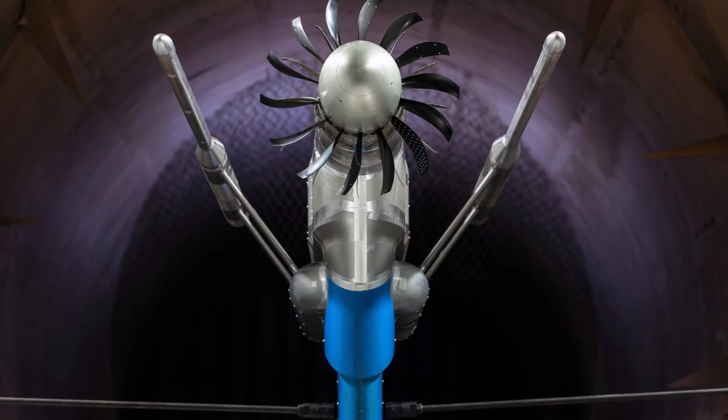Because here is what most people do not realize. An airplane does not fight gravity. It uses something else entirely. And the moment you understand what that is, you will never look at a takeoff the same way again.

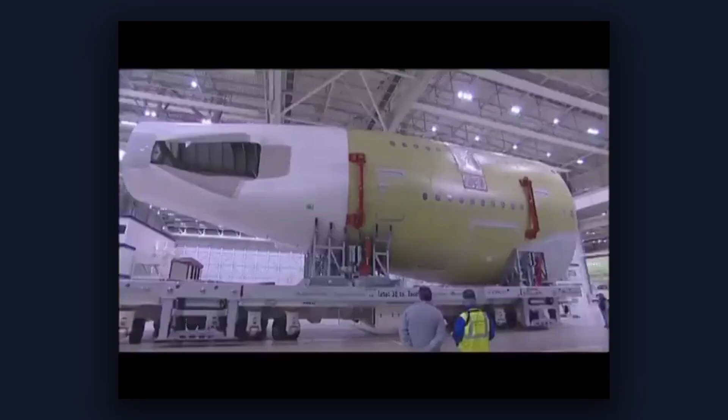Let us start with the scale, because it matters. The Airbus A380, the largest passenger aircraft ever built, has a maximum takeoff weight of around 575 metric tons. That is roughly the weight of a fully loaded freight train. Not a car, not a truck, a freight train.

And this machine does not just barely get off the ground. It climbs to 40,000 feet and cruises at 560 miles per hour for up to 15 hours without stopping. By common sense, something that heavy should never leave the ground. But common sense is wrong here.

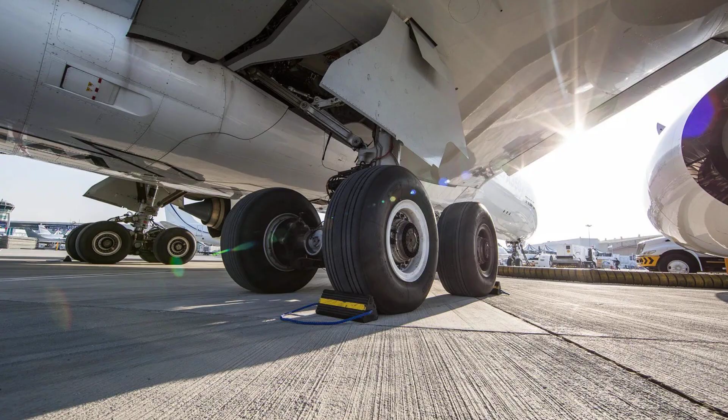And here is why. Every airplane in flight is controlled by four forces. Weight is gravity pulling it straight down. Lift is an upward force generated by the wings. Thrust is the engines pushing it forward. And drag is air resistance pushing back.

When lift equals weight, the aircraft holds altitude. When thrust equals drag, it holds speed. The moment one of these forces shifts, everything changes. It is not magic, it is not defying physics, it is physics working exactly as it should. But that raises the actual question: where does lift come from?

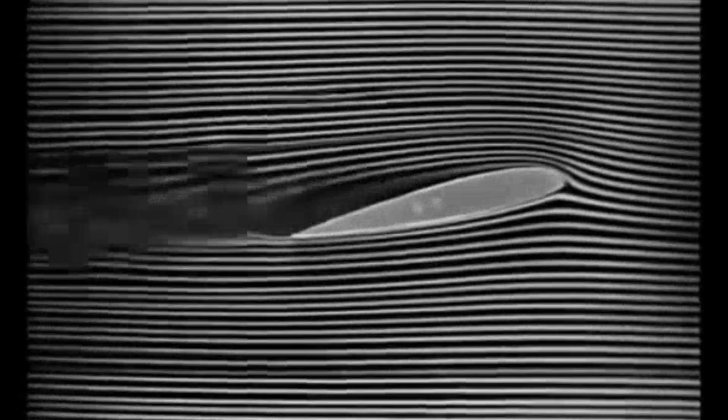You have probably heard the standard explanation. Air over the top of the wing travels a longer path, so it moves faster, creating lower pressure, which pulls the wing upward. That explanation is taught in schools. It is also incomplete. In some cases, it is just wrong. Here is what actually happens.

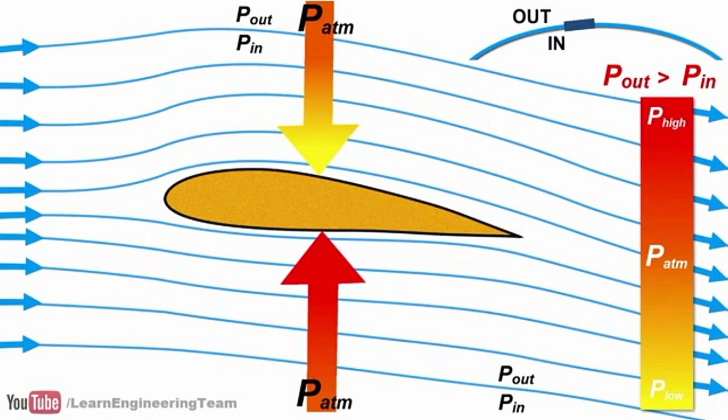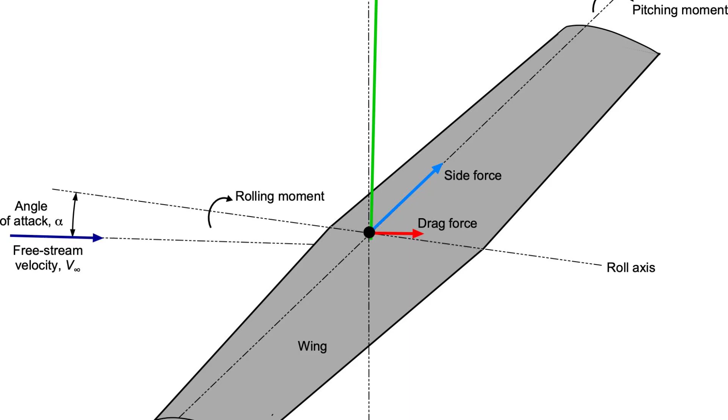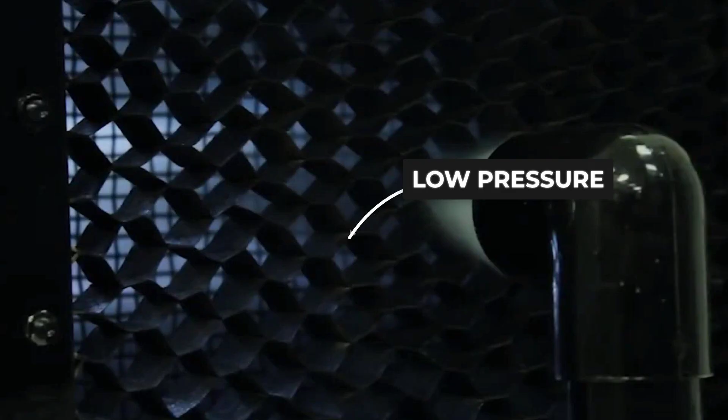A wing has a specific shape, curved on top and flatter underneath. During flight, the wing is angled slightly into the oncoming airflow. That angle is called the angle of attack. As air flows around the wing, the flow over the top surface accelerates. Pressure above drops. Pressure below stays higher. That pressure difference produces an upward force. But that is only part of it.

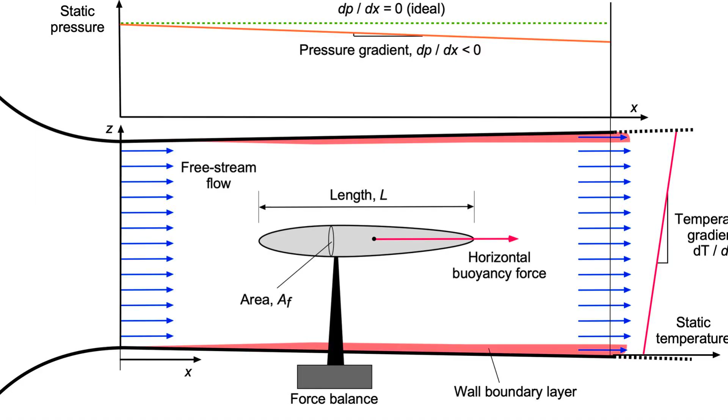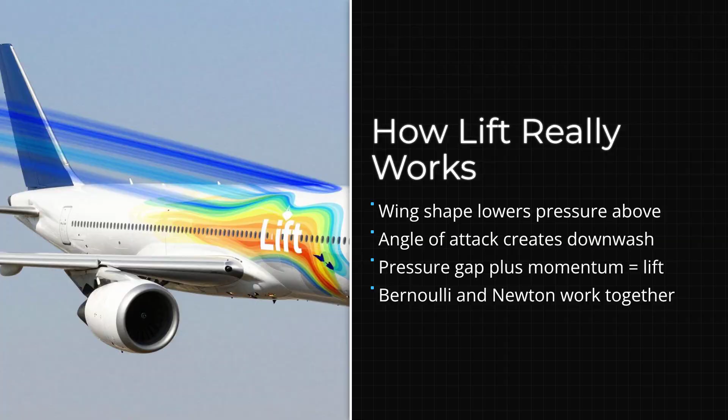The wing also deflects air downward. According to Newton's third law, if the wing pushes air down, the air pushes the wing up with equal and opposite force. Bernoulli and Newton are not competing explanations. They describe the same event from two different angles. Lift is the result of both the pressure difference and the downward deflection of airflow. Together, they hold hundreds of tons in the sky.

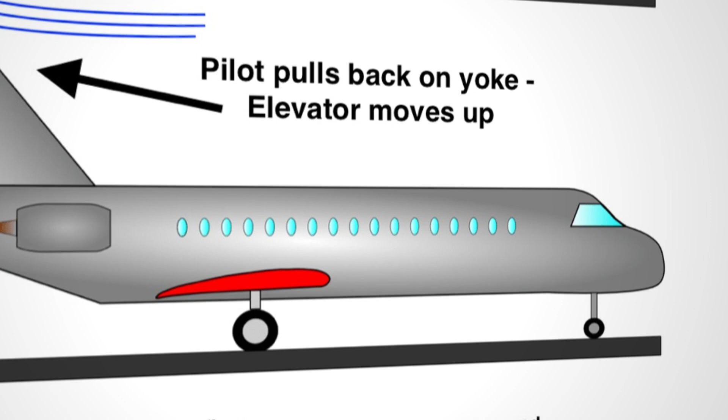But here's where it gets interesting. The pilot controls how much lift the wing generates in real time during flight. The key variable is the angle of attack. When a pilot pulls back during takeoff, the nose rises and the angle of attack increases. The pressure difference across the wing grows, more air is deflected downward, and lift increases rapidly.

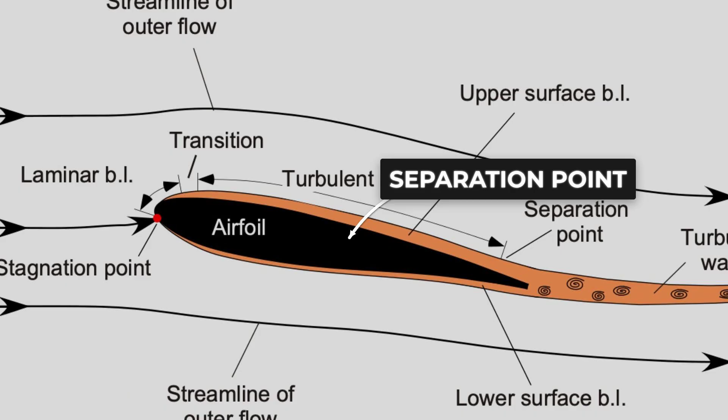But there is a hard limit. Push the angle of attack too far, and the airflow over the upper surface can no longer stay attached to the wing. It separates. Pressure distribution collapses and lift drops suddenly and violently. That's a stall. Avoiding it is one of the most critical jobs a pilot has.

Speed is the other half of this equation. Lift depends on velocity, and not linearly. In the lift equation, velocity is squared. That means if you double the speed, lift increases 4 times. Cut speed in half and lift drops to 1/4.

This is why an aircraft cannot just roll onto the runway and slowly rise into the air. It must accelerate to a specific minimum speed before the wings can generate enough lift to equal the aircraft's weight. Only at that exact moment does the aircraft lift off, not because it became lighter, but because the aerodynamic forces finally caught up to gravity.

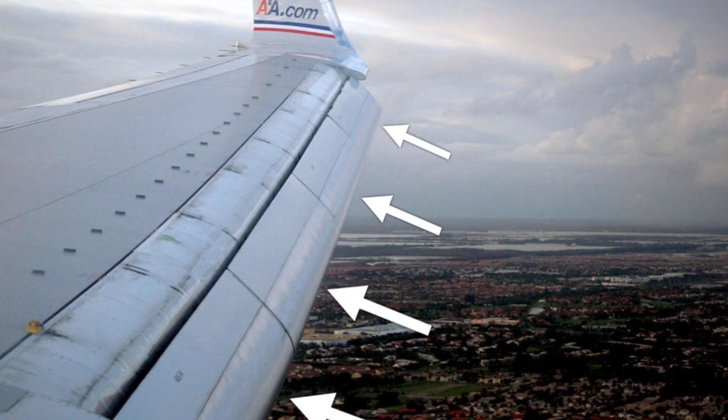Now, what about low speed? Takeoff and landing require the aircraft to fly slowly, but the wing generates less lift at lower speeds. So how does that work? This is where high-lift devices come in. If you have ever sat by the window and watched the wing before takeoff, you have seen it.

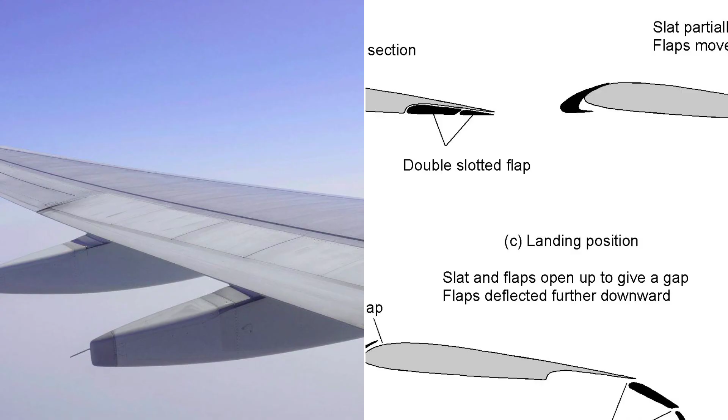The wing changes shape. Flaps extend from the rear edge. Slats extend from the front, creating a narrow slot between the slat and the wing. This does three things at once. It slightly increases the effective wing area. It significantly increases the curvature of the airfoil. And it dramatically increases the lift coefficient, which is the wing's ability to generate lift at any given speed.

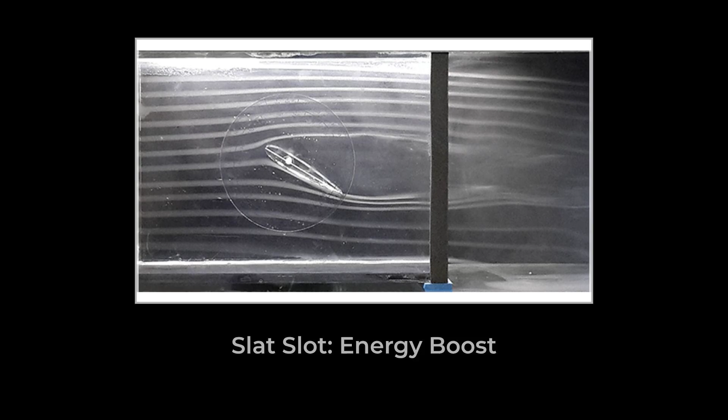The slats do something especially important. The slot they create allows high-energy air from below the wing to flow over the upper surface, helping the airflow stay attached even at high angles of attack. This delays the stall. That is why aircraft can safely operate at much lower speeds during takeoff and landing without losing control.

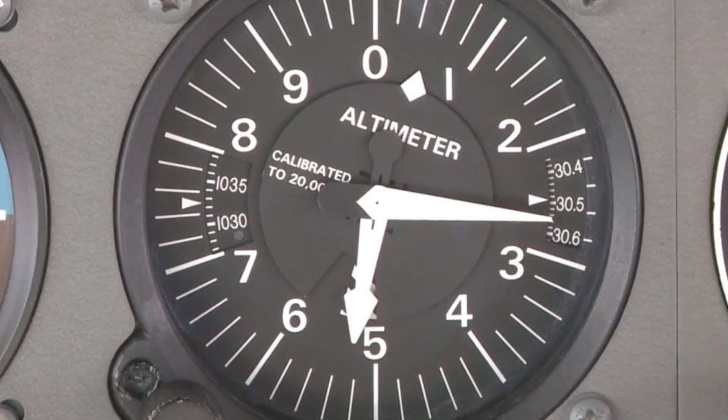So why do airliners cruise at 35,000 to 40,000 feet? Here is what most people miss. At that altitude, the air is thin, much thinner than at sea level. Drag depends directly on air density. The thinner the air, the less resistance the aircraft encounters. Less drag means less thrust required, and less thrust means less fuel burned per mile.

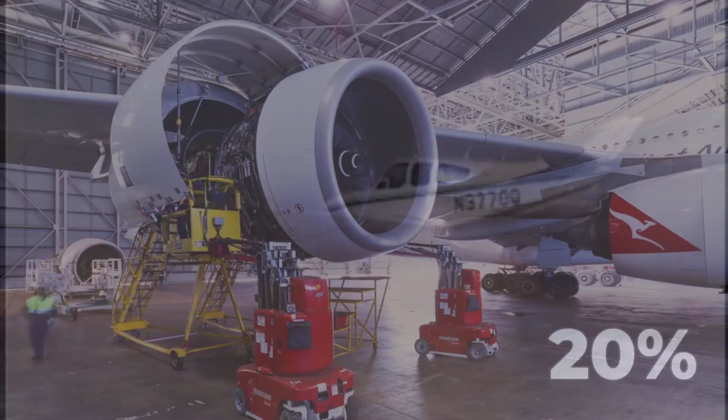The engines also perform more efficiently in the cold, thin air at altitude. There are fewer weather systems up there, and less turbulence from terrain and surface heating below. As the flight continues and fuel is burned, the aircraft becomes lighter, and it can climb even higher, a technique called step climb that squeezes out every last fraction of fuel efficiency.

But here is what all of that means at a deeper level. The aircraft is never just sitting in the sky. It is continuously interacting with the air around it. Every second of flight, an enormous mass of air flows around the wings. The aircraft gives that air downward momentum. The air gives the aircraft upward momentum in return. Lift is not a passive force. It is the constant, active result of the aircraft reshaping the airflow around it, thousands of times per second.

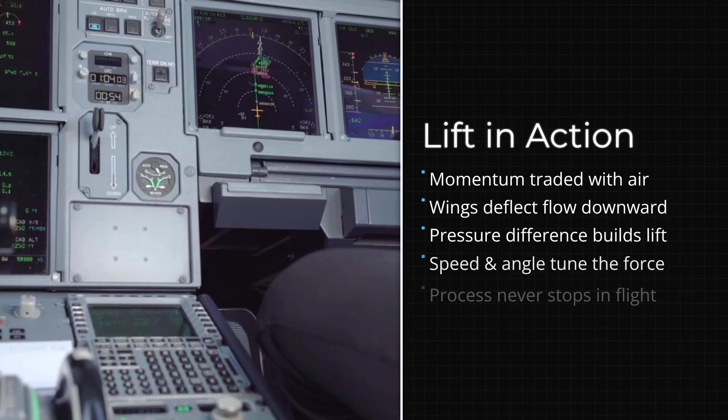That is the real answer to how a 500-ton machine stays in the air. It does not defeat gravity. It earns lift, continuously and precisely, through aerodynamics, speed, angle, and shape, all working together in a system that has been refined over more than a century of aviation engineering.

And here's the part that still gets me. The next time you watch a fully loaded A380 lift off the runway, that enormous machine carrying hundreds of people and hundreds of tons of fuel and cargo, it does not jump. It does not struggle. At a very specific speed, the runway simply stops being necessary. The ground lets go, and physics takes over.

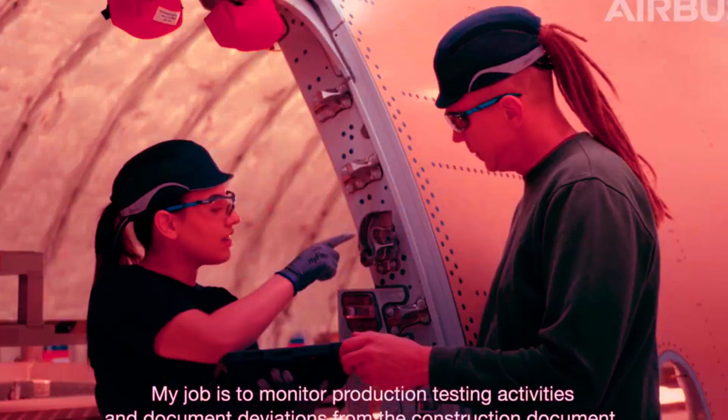That is not magic. That is engineering so well understood that it works the same way every time, all over the world, hundreds of thousands of times a day. And now you know exactly why. If you have ever wondered how that same aircraft actually stops after landing, that is a whole different system, and it is just as surprising.